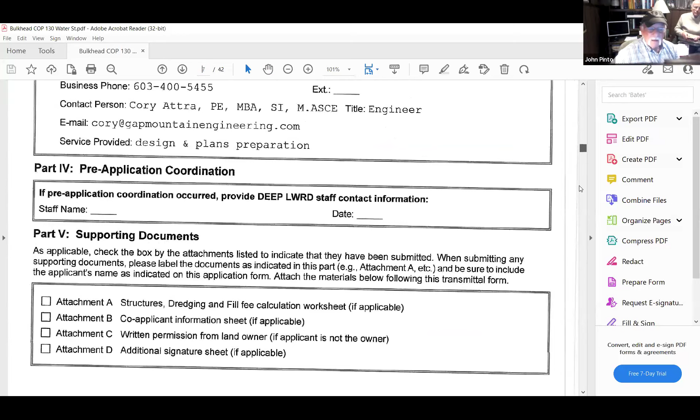Well, we could start with the first one. We're looking at the pictures. That just shows location, site location. Bring this way down here, way at the bottom, just keep scrolling down. Okay, there you go.

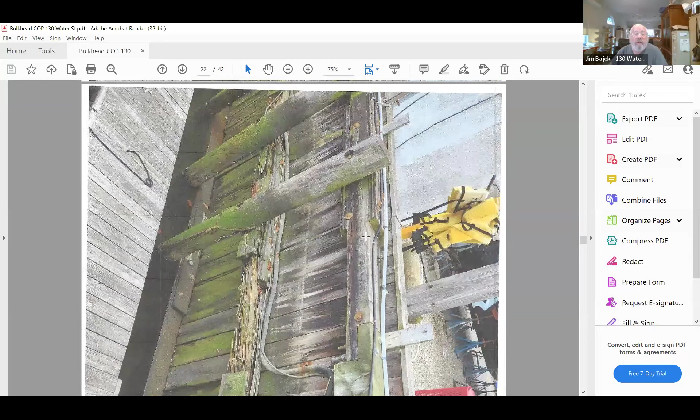There's photographs of the site. By the way, the wall is starting to fail. I don't know if anybody's been down there lately, but Gary Wetmore from GNC Marine did some patching up recently just to stop whatever was actually in the action of starting to fail in one section. So he put some new boards in that area, just so we can buy some time.

Amelia, can you highlight, with your marker since you have control, the area that Mr. Bajek is referring to -- the wall? Right along here? Yeah, right, exactly, and that includes the travel lift pit. So the new wall will be physically connected to the existing walls on both adjoining properties.

Why don't we shift to another plan? Yeah, you see, I couldn't flip these files, Jim. Yeah, neither can I, unfortunately. I wish I could show you my plan, but when you submit these JPEG files, Jim, I've always had a little bit of a problem manipulating those files.

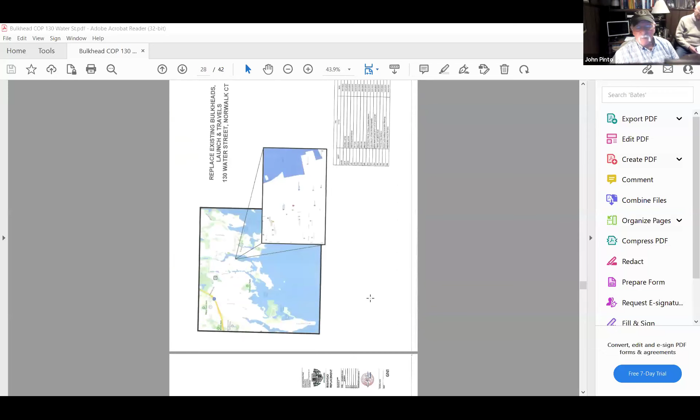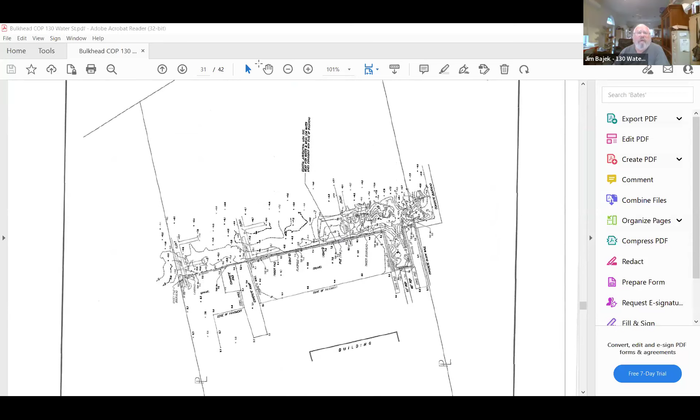Do you Xerox copy them first, or send them as a direct JPEG file? I put them in my scanner, and they get scanned that way. Okay, all right. But I've got the electronic files -- there we are. I should have sent the electronic file to you, John. That would be a lot easier, Jim, because I could then manipulate them and turn them to the proper orientation. Next time I will definitely do that. Okay, that's helpful, thank you.

Okay, well, that's just an overhead view. If you could scan down, just keep going. That just shows sections.

Okay, that's from the topo from the survey that was done. We show elevations on that, and we also show on that plan the new wall that will be within 18 inches of the old wall. So scan down a little bit more.

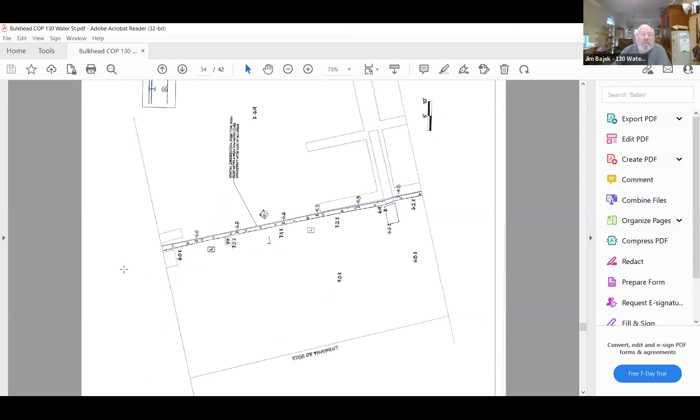That's kind of the same with the other one, just a continuation -- that's the travel lift pit. Let's scan down some more. Okay, right there -- that is pretty much the meat of what we're doing.

We're going to be excavating along that line that starts near the bottom of the wall there and feeds back towards the land. So you're talking about the shaded area, Jim, right? Yeah, I'm trying to. Right, okay, I got it.

We'll be removing that material and temporarily stockpiling it. We're also going to be testing it as we're removing the material to make sure we're not dealing with contaminated sediments, and we're going to be retaining what's clean and what might be suitable for reuse back into that location.

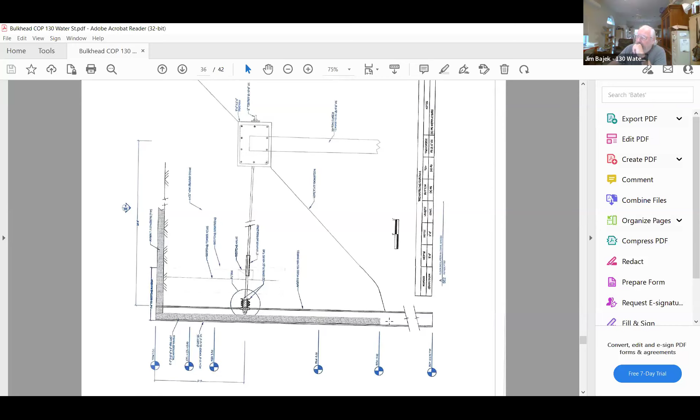Once we do, we're going to excavate in sections. We're not going to excavate behind the entire wall at once, so we'll be working with sections so we can deal with the material better. Then before we actually do the excavation, we're going to install the sheet piles in front of the old wall, so we'll have a strong barrier that we would excavate behind.

It's going to be steel plate, right? Yeah, yes, regular, kind of the tongue and groove steel sheet piling. Right, and are you replacing a timber bulkhead there that I saw in the photographs?

Is that right? Yeah, right now it's a timber bulkhead. The new one's going to be all steel, but the timber one will remain behind the new one. We're not going to remove it, we're just going to install the new wall in front of the old wall, and then we'll excavate behind the old wall. We will probably end up removing some of the old wall because it's probably going to start crumbling. Any good sections we might just leave in place.

But once we excavate enough for driving in piles for the deadmen, that will be done. The deadmen will consist of timber piles driven down into the earth, and then a concrete encasement will be installed on top of each pile, which will be the deadmen. Then a 2-inch steel rod will be connected from that deadman to the new steel sheet pile bulkhead.

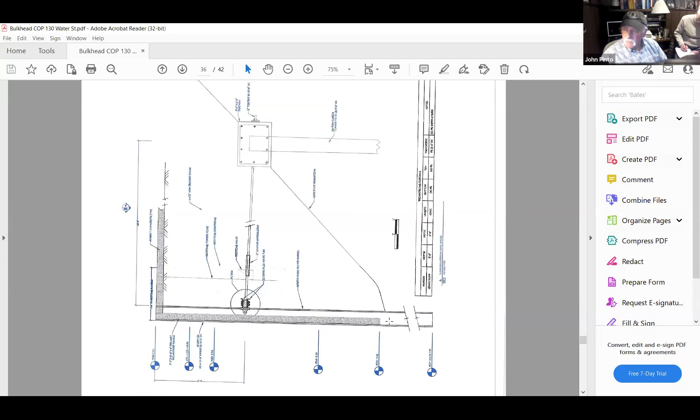That was a concern. Okay, so, sorry, one more clarification. You said it was going to be a corrugated steel sheet piling for the final wall, but the drawings show 5x5 precast reinforced panels. So it looks like it's reinforced concrete as the final bulkhead.

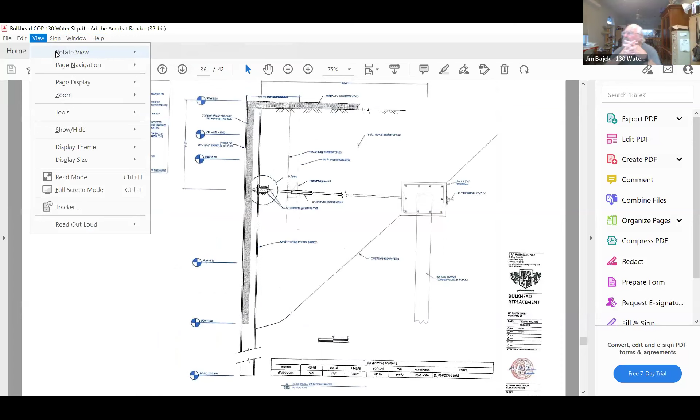On this, you can turn the drawing if you hit view, rotate right, you just lose the other ones. That's what I got up on my screen. Yeah, I see exactly what you mean. Yeah, you did it one too many.

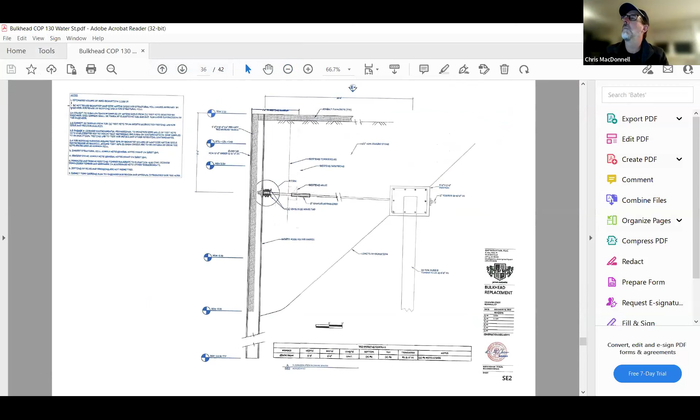My last conversation with Gary Wetmore, he was planning on doing sheet metal, but I understand what you're saying here. Yeah, it's the first note down along the vertical wall there, that it's precast reinforced panels. That's concrete, which is fine. It's a different construction.

You'd need... It's funny, that was actually my question as well, Chris, because those 2-inch couplings that are basically the reinforcement to keep that tension, I thought I saw somewhere there was 10 feet on center for those. Is that the frequency? For the piles, for the dead men? No, for the reinforcements, those are basically the tie rods that are coming back to keep the pressure in.

Let's see, and that would be consistent with a precast panel. It's funny because I didn't think... but they would be on 5-foot centers.

But yeah, I was looking to see, as Chris is mentioning, where the depiction of the tongue and groove style exterior metal facade was. It didn't seem like it appeared on the drawings. You are correct on that. I'm not sure, I'll have to get clarification on that. Well, these are signed and sealed, so they're what the engineer wants. I'll get it from the engineer and from who's going to be doing the work.

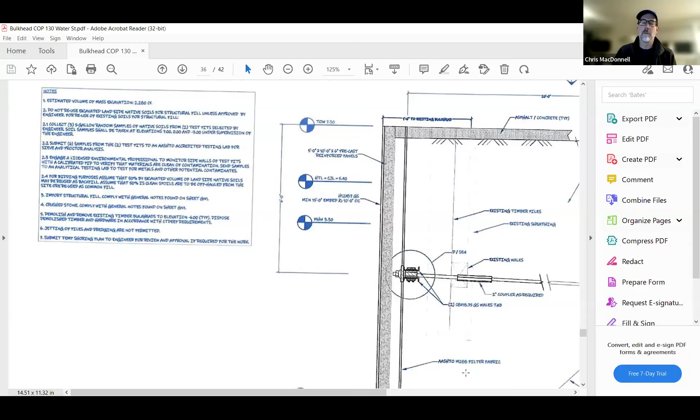So is this going to be dewatered in order to construct the dead men? No, it's below, it's in the tidal zone. I mean, it's below mean high water. Well, Jim, I guess it depends how watertight the new wall is before the excavation starts.

Well, Jim, as far as the commissioner is concerned, you certainly get to poll your response to that. But I think we don't have the actual diagram, the drawings that you propose, and we would like to have what the new proposal would be before we can pass on this. I was wondering if we should table this until next month. I think that would be a good idea, and I think I'd like to have the engineer that designed it present as well.

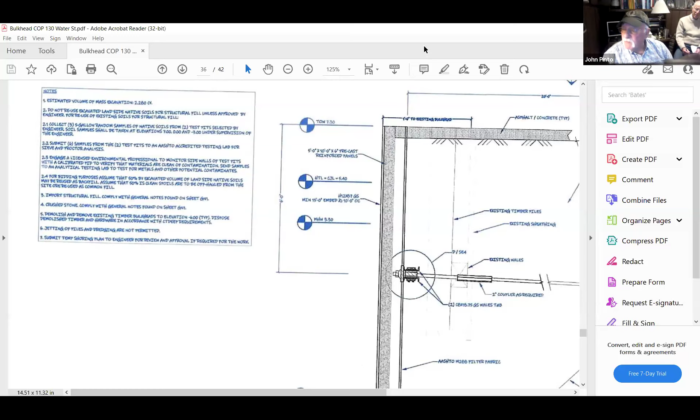Well, all right, so why don't we table this till next month? When you have all the plans together and all the I's dotted and the T's crossed, we'll look at the diagram as reviewed in the presence of your engineer. That's fine, I have no problem with it. Okay, all right, so we'll put this on abeyance until next month.

I'm not the engineer, so it's hard for me to answer some of these technical questions. That's all right, I'm glad we do have some engineers, especially Chris, and certainly Mr. Kibbe is well aware of reading diagrams. Thank you very much for that, guys. And we'll hold this in abeyance, Jim.

All right, so when you get your plans together again, resubmit them. If you can submit them again in that PDF format, we'll... Yes, we can certainly do that. That'd be no problem. Yeah, identify where the stockpile area is on the new plans too. Well, that would be helpful, because before we make any recommendation, we would like to have everything intact in one place. Sure, yep, thank you. All right, Jim, thank you very much.

All right, the next application is at 10 Nearwater Road. It's a COP application, a modification to an existing residential dock. The agent is Tim... oh boy, Barton...

I can't say it, Alan was having problems, so am I. I got to get my lips recapped as well, Alan.

Di Bartolomeo, anyway, from Sound Engineering Associates. It's an application from Andrew Ryan, who proposes to construct a fixed timber pier measuring 4 feet by 70 feet, of which 10.5 feet will be waterward of the coastal jurisdictional line, plus a 2.5 foot by 24 foot aluminum gangway leading to an 8-foot by 12.5-foot floating dock. The work includes removal of 10 timber piles and installation of 6 new timber piles.

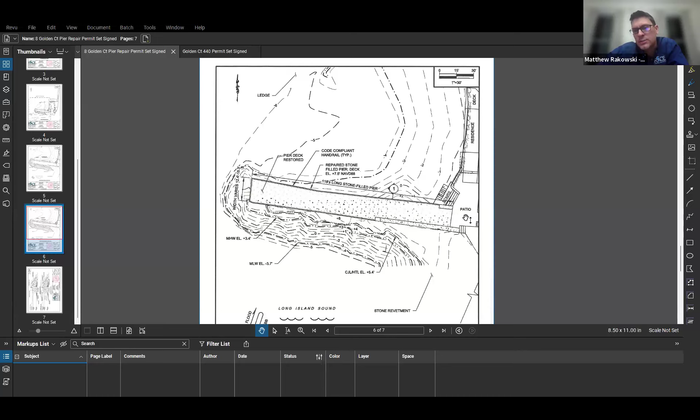Everyone got my screen? Yes. So applicant is seeking to just restore this stone-filled pier structure. It's a whole old historic permitted stone-filled pier. The face of the pier, which is on this north side, stones have been slowly shifting and moving. So what we're seeking to do is peel back the current walkway on the top surface, pull back the stones, reset the face stones, grout the inner core, then pour a new structural slab over the top, tying into this patio. So raising it, there's a couple steps that go down to this now, just to make a seamless integration with the upland area. We're seeking to get rid of those couple steps so you can walk straight out onto the pier. The proposed work is all within the existing footprint, we're not extending any further waterward.

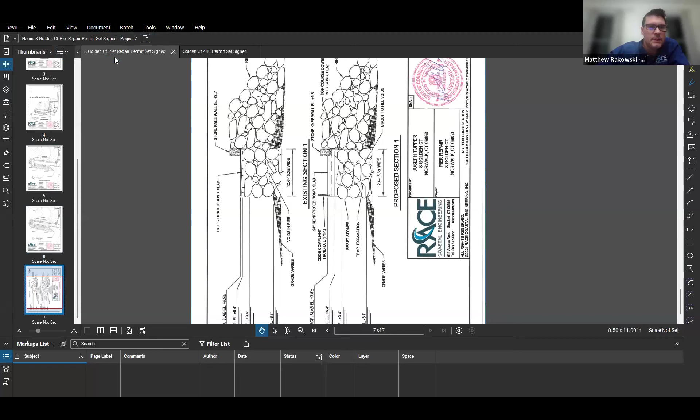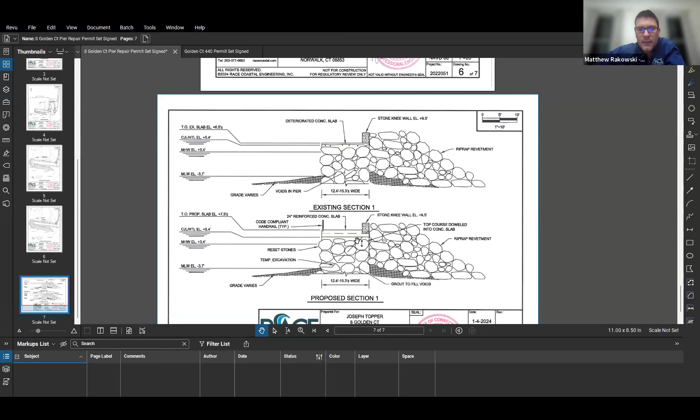Do have a section here, which I can rotate. So the existing stone-filled pier on the south side, it's backed with an authorized stone riprap. So basically pulling back this slab, resetting stones on this face that have shifted and moved, grouting the center core, and then pouring this new structural slab on top. Work will be confined with the turbidity curtain, anticipate that it's all done by land with a mini excavator, crawling out, demoing the slab, and working their way from the waterward end back onto land as they're pulling things apart, resetting stones. They're slowly working their way out of the site with the final installation of the structural slab.

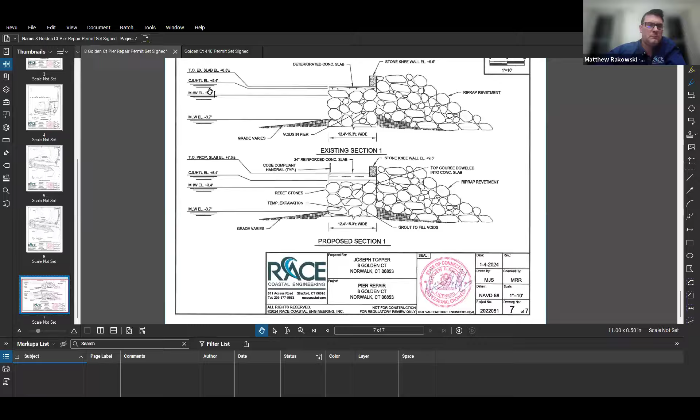Does any of the commissioners have any additional comments? Matt, Chris? Yeah, a couple questions. I guess if you wanted to show, we got to see some of this earlier, but if you wanted to show some of the photos just to give people a better idea of the existing condition versus the new. Yeah, those are very helpful, and that'll also help people understand the tie-in between the secondary application that we're going to talk about next. Right, it's going to be in the exact same footprint, so there's no change in the footprint of the replacement of the wall and the structure. Correct, yeah.

Or there we go. Right. Yeah, they are. Yeah, so perfect.

So the structural slab is cracked, deteriorated. So he's seeking to restore that. Again, since he's restoring that, he wants to repair it.

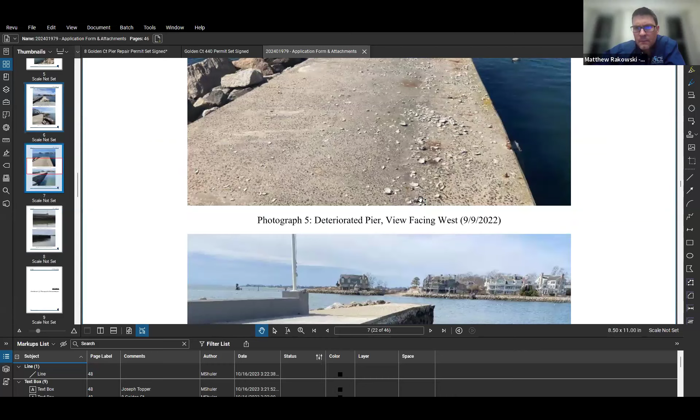And again, you see those two, it's like one full step and then a half step. So again, trying to just raise it so that it's a smooth transition between the patio area and upland area to this here. So Matt, we have a question about whether it's consistent, but like it's an improvement of the existing structure and certainly...

Matt, is it fair to say that the other side of this is deteriorating? And if it's not repaired as you're proposing, then there would be a deterioration of material into the harbor? Correct, we would envision that the stone shifting would get worse, sections of that interior wall would start to fail inwards, likely leading to the loss of these slabs into the water.

And I think with that understanding... and it's within the same footprint, then a finding of consistency with the plan would be appropriate here, because you're repairing a structure that otherwise could result in an adverse impact on the harbor. But with the understanding that it's within the existing footprint and that you have proper measures, best management practices during construction to protect the harbor, then my suggestion would be this could be consistent.

Consistent with the plan. Yeah, because if it was just in the same footprint and wasn't improving the situation in the harbor, then we'd have no problem with the project moving forward. But now here, since it's going to be an improvement of this existing structure and protecting the harbor from further debris going into it, then we would find it certainly consistent with the harbor management plan.

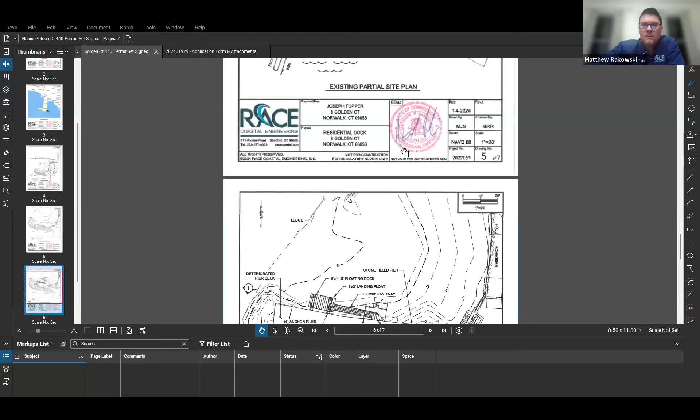Okay, yeah, so this project's a residential floating dock. This is 8 Golden Court, same property we were just talking about with the stone-filled pier in the last application. On this one, he's seeking to add just a little access platform to get to the gangway down to a floating dock. Due to the grades and how shallow it is, to keep the float 18 inches off the substrate, we ended up having to install a four pile system so that we could put a frame underneath so that the floating dock during low water would sit on the frame, so that it doesn't impact the substrate. The system was pulled as close to the pier structure as possible, minimizing encroachment out into the water, due to the fact that there was really no additional water depth that could be gained from coming out perpendicular to the system. So keeping it condensed as close to the existing pier structure, we thought would be the best beneficial use for the applicant.

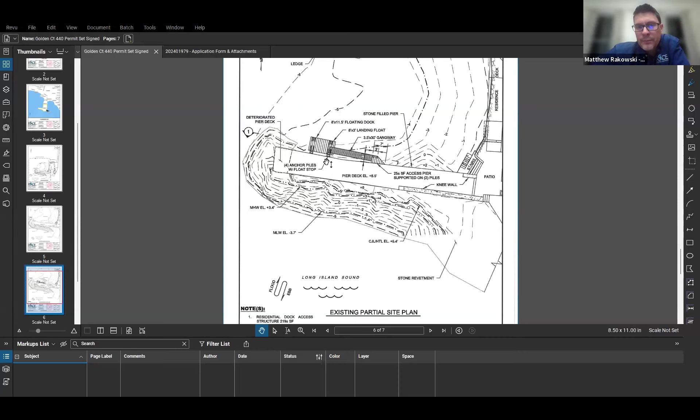The piles would be anticipated to be impact driven by a barge and land barge based crane, followed by laborers and land-based equipment for framing out the upper landing as well as the framing for the floating dock. Once the framing and the pier are set and installed, the floating dock would be floated over and set, and then the gangway would be set on top, again via the land-based barge-based crane.

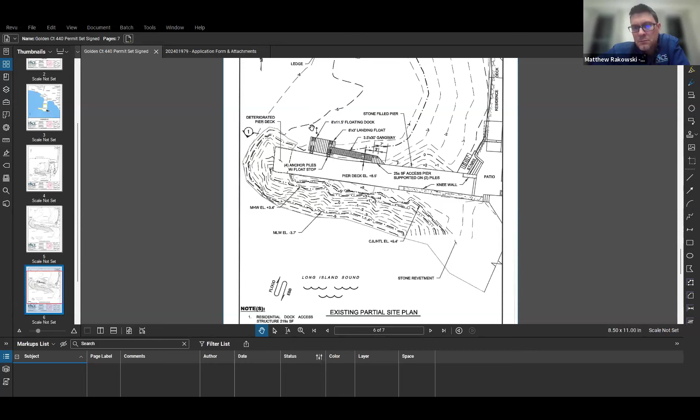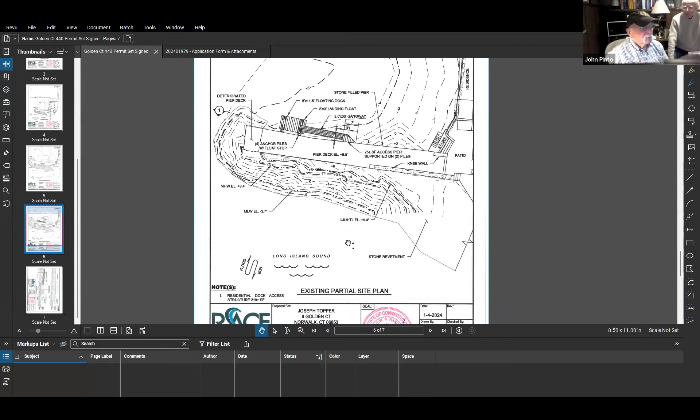Matt, oh yeah, okay, all right, Jeff, you have it. Yeah, so this is a 440 dock, so you're not applying for a certificate or a permit application. It's in effect approved as of right, unless there's some issues raised with respect to navigation or the environment, but this is a registration, not an application. Correct, this is not a COP, it's under a general permit application. Oh, okay, all right.

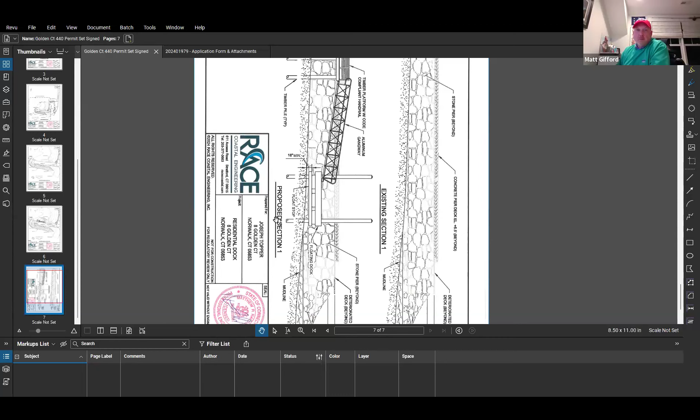Okay, that's been changed. Is there enough water here so that a vessel attached to it would not rest on the bottom, or how? It's about a foot of water depth during low water on the face of that dock, so that's why the floating dock system is up on a frame. So yeah, long-term berthing, etc., wouldn't be viable through all tide cycles here. Well, that would be certainly our concern, and certainly a concern of the Shellfish Commission. Yep, that any appreciable length of time at that dock would not require being at low tide, right.

Does anybody, Chris, Matt, have any comments, concerns? No, between the original and this is pretty clean, and all the information was there. So I think, Matthew, thank you for the complete nature of this.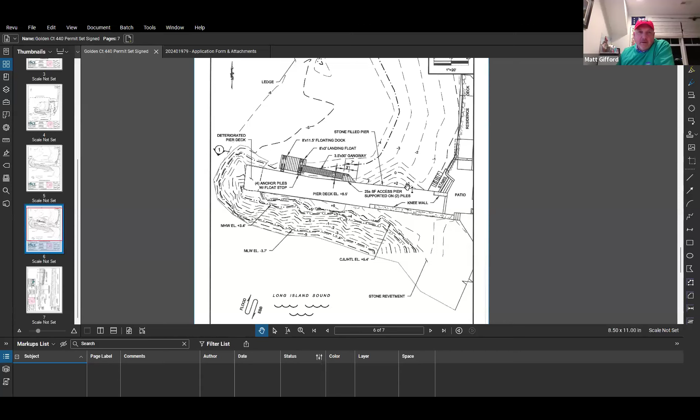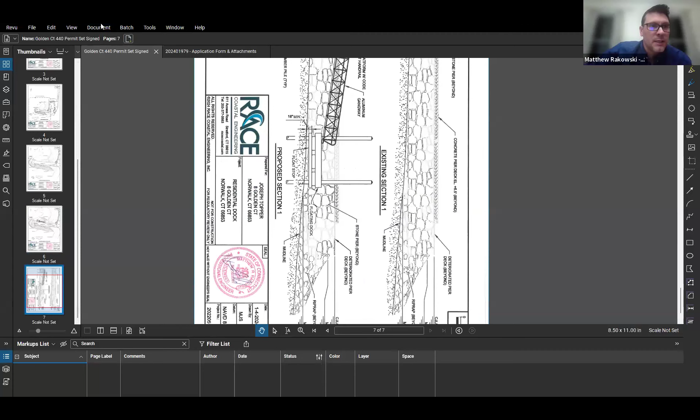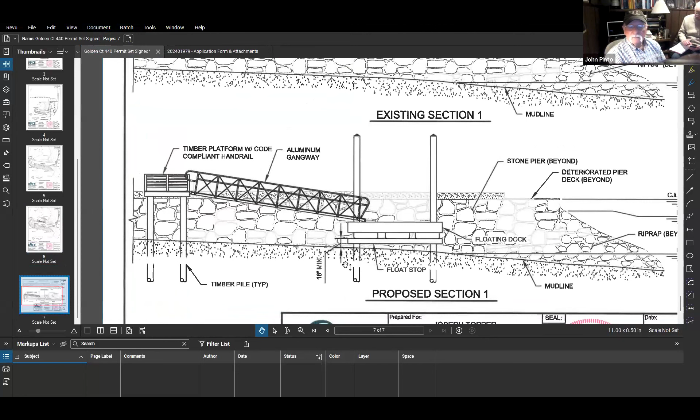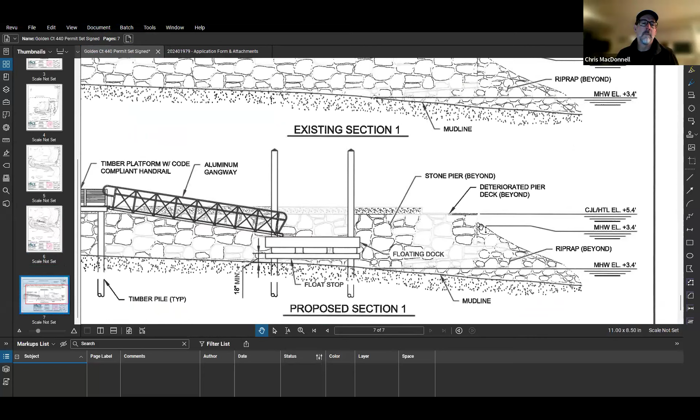Thank you. Is there a section of the floating thing you could put up again? Yeah, hold on, let me rotate that for you. It's upside down. Here we are. Okay. Thank you. Oh yeah, so the access platform is the same elevation as the stone-filled pier, so a smooth transition from the upland area onto this pier, and then walking down onto the floating dock, with the timber float stops underneath to support the frame during periods of low water.

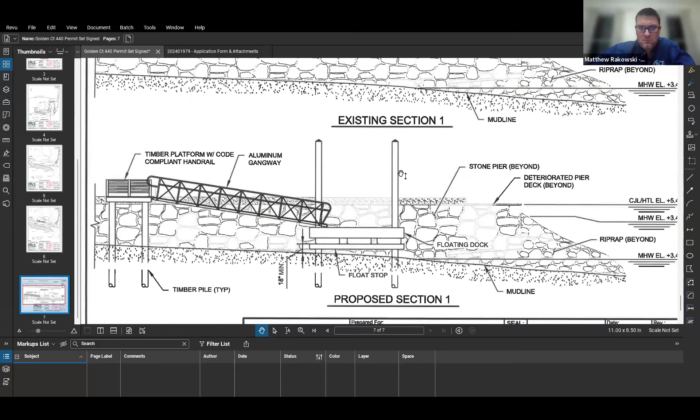Is there anything else? Anyone like to second that proposal? I'll second. All those in favor?

Aye, aye, aye. Doing a good job here, guys.

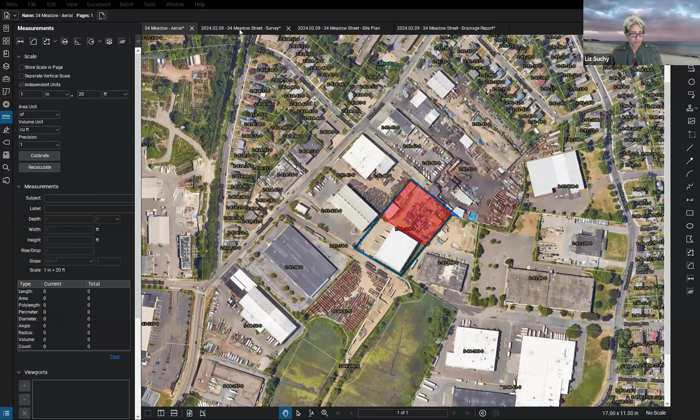Just a little zoomed in section of this piece of property. As Liz mentioned, there are 2 existing structures to the north, another masonry building to the south, with all the car storage sitting central on this piece of property.

Again, this is the existing rock crushing facility here to the west. The entire property is within the AE 11 flood zone, and there is currently no drainage on the property. The water basically sheet flows off property to adjacent properties to the east.

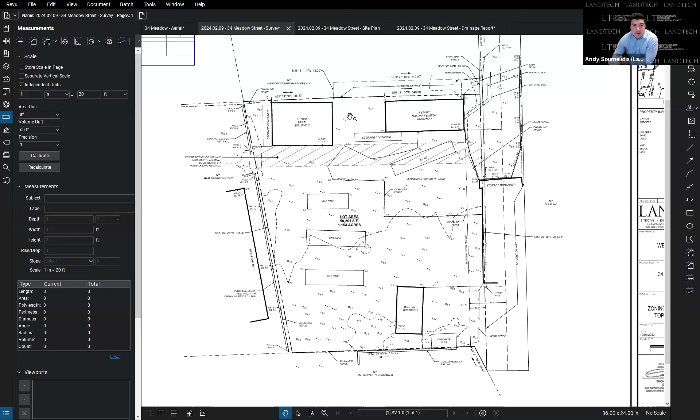Under proposed conditions, we're looking to add a 20,000 square foot structure, which would house another rock crushing facility indoors. To the west and south are the storage bins, again mafia blocks holding up and containing that material.

The property to the west here was raised above the base flood elevation about 7 years ago when we did this project. So the idea here is to continue those retaining walls around the perimeter of this project and get the structure above the base flood elevation of 11. The finished floor of that new structure will be elevation 12, 1 foot above the base flood elevation.

You can see here a fairly large drainage system sits central with some new catch basins that connect into it, and another smaller drainage system. These are underground detention Cultec wrapped in crushed stone and filter fabric, with a catch basin here at the entrance. So basically all the runoff here and all the roof drains also connect into this larger one.

So all new impervious surfaces will be captured and piped underground to these detention and filtration systems. We're reducing the storm event up to the 100-year storm, as well as providing more than double the water quality volume that's required on this site. That's really driven by needing to reduce the 100-year storm, so there's ample capacity within our new drainage system here to really reduce flows.

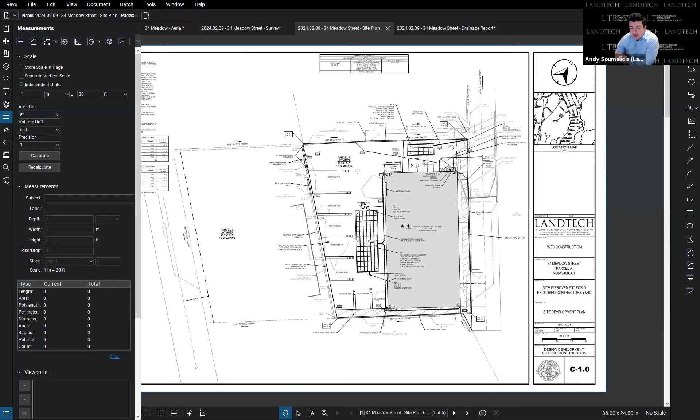And I'm sure we would have heard from neighbors if there was concern with what's going on next door. So yes, we are putting in measures to attenuate the sound.

With that understanding that the improvements in stormwater and dealing with flood hazard, a reasonable finding would be consistent with the harbor management plan. To the best of my knowledge, there haven't been any noise complaints registered or issues related to the existing operation in the adjoining building. This structure is tucked behind other buildings, and that in and of itself acts as attenuation of noise, so we can move forward with a proposal that the application is consistent with the harbor management plan because of the improvement of existing conditions of water effluent flow, runoff, et cetera, and noise abatement.

Has there been any testing of the soil, especially in the areas you're going to be removing? You're going to have to remove a fair amount of soil to put in the Cultec system. So we're going to be building above the existing conditions because we are filling. The current grade around the site is elevation 10 down to elevation 8, so we're not taking out material. We're going to keep all the material on site, and we're basically capping it with asphalt in our building. So we're not going to be hauling any material.

Including where you're going to install the Cultec system? Correct, because there's a considerable amount of fill. We don't anticipate any material coming off site. Right, all right, thank you.

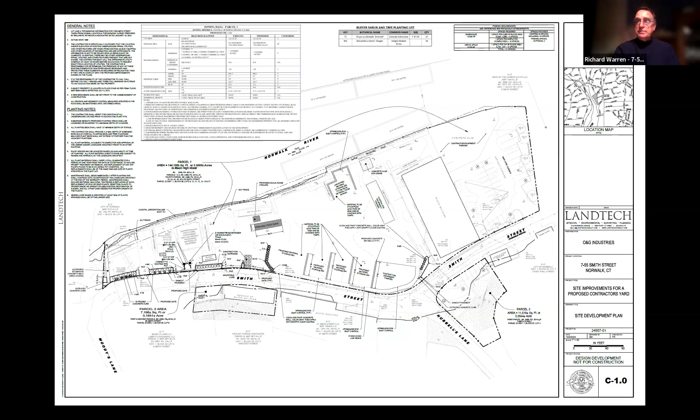Does anyone else have any comment? They're restoring waterborne transport.

That was something that one of the many reports commissioned by the city to evaluate various places in the city suggested be reviewed—that waterborne transit is important. It gets trucks off the turnpike. It's something we should be taking advantage of in an ecologically friendly and appropriate way. Use of the harbor and the Norwalk River with this type of use is beneficial and consistent with the Coastal Area Management Act, since it's waterborne transit.

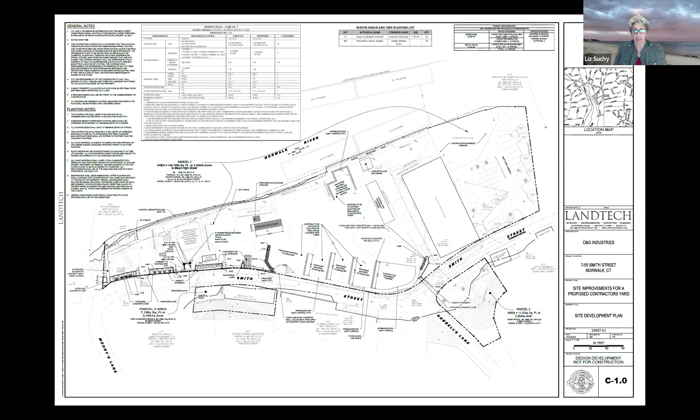From a personal standpoint, as an individual, I certainly recommend and go along with using the water as a source of transport rather than keeping X number of trucks on the road. We try to do that with regard to the neighbor across the street, Divine Brothers, and the oil trucks coming in at one time, or barges—sand barges and such—that eliminate the amount of truck traffic on the road.

It seems appropriate now that we're hopefully going to be confronted with a working railroad bridge in the near future, a reliably opening bridge. So this makes some sense.

So certainly willing to restore the use of that upper harbor with regard to traffic going underneath that bridge, bringing a bit more life up to that area rather than just people walking along the waterfront.

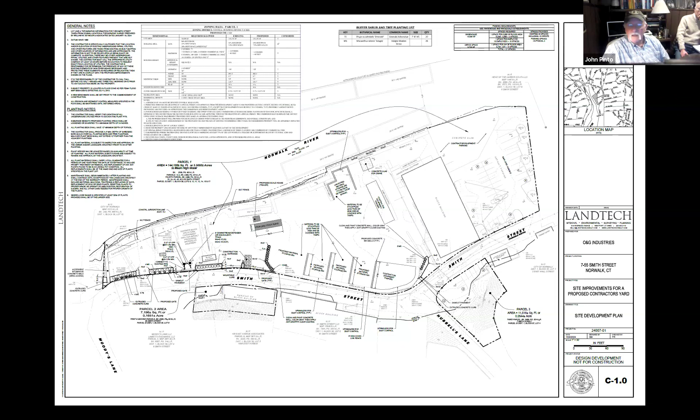This I would find, from my standpoint anyway, we'd like to make a recommendation that the application is consistent based on the improvements with regard to the conditions of water effluent in the harbor with the harbor management plan. And so I wanted to ask about the navigation channel in relation to where you'd like to station barges.

Are the barges intruding on the navigation channel? Because with the other set of barges across the river—Divine hasn't really tucked that barge up very close there. If you have another barge on the other side, you're pretty much blocking access to the marina at the head of navigation.

If I may respond to that—Richard Warren with O&G Industries. At the time the federal channel was last dredged, DEP and the Army Corps recognized that, and there was a revision to the channel line that works around the barges snugged up against our berth. We've drawn those on our plan to accommodate being outside of the channel line.

It will be close if there are barges on both sides. Historically, we've always negotiated with Divine, and because we use similar tug companies, we operate and address it, obviously not bunching up the end of the harbor, but there is still navigable water between us to get to the marina, even if both sides are active.

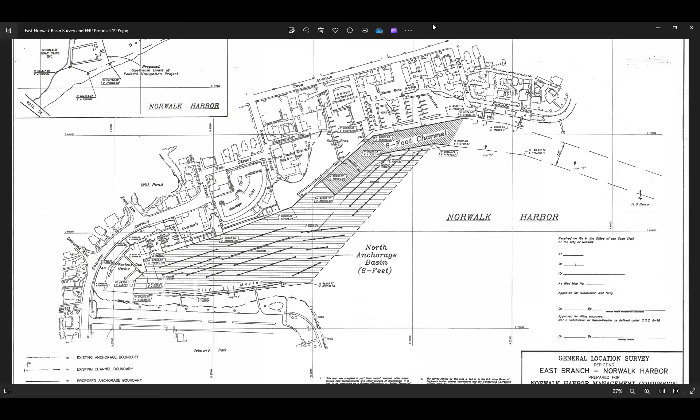So the concern, if you let me see if I can increase this here. All right, this concern now, back in the early 90s, the Harbor Commission, based on the Army Corps of Engineers noting that there were several encroachments in the East Basin, had certainly by an act of Congress and certainly working with the Army Corps to change the boundary lines of the navigation channel, and we're also at the set point at the end of where the navigation channel is. So we truncated that to fit the needs of many of the people that were encroaching in the harbor.

I'm sorry, what is before us now? Well, there's nothing before us now, but I think there's going to be some further interest in putting boats along this dock here, this line here. Now, if you notice, here's the Federal Navigation Channel, and what I guess several people at Vantage Point want to do is to keep their boats moored at the end of this dock here.

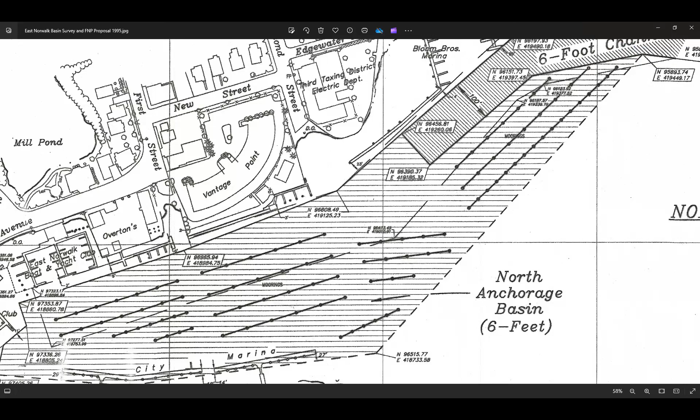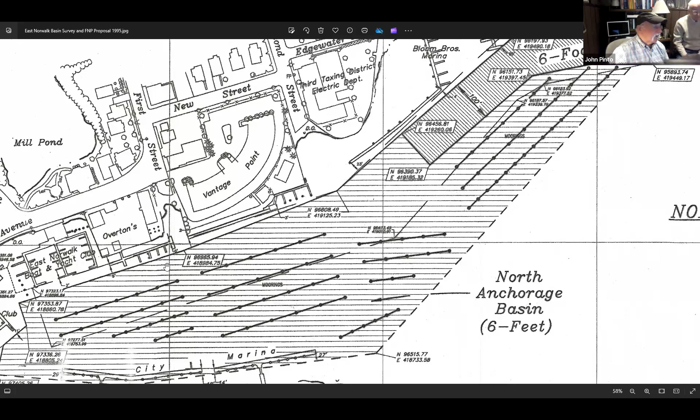That's right. And of course, the other issue at the end of First Street is they've got that finger sticking really in the right of way of First Street. They've encroached by 12 or so. And if we're talking about street ends and kinds of development and waterfront access for the residents of Norwalk, what better spot than to have a little access point there, where somebody's put up a corrugated metal fence so you can't get in there.

Well, again, Alan, that's not up for grabs, but that's up for a future permit that Overton is going to put in, and they still retain this little section right here, which is encroaching on the city's right of way in this area. Right, and that should be opposed as well, as far as I'm concerned. I guess, exactly, that's my opinion.

So these are some of the things that we're going to be faced with, and things that we're going to have to contend with as a commission. And what I'm really concerned about is, again, we certainly have the right to review that application, but they're going to start challenging the Harbor Commission's right to review the application based on that court decision.

That's happened in several other towns around the state already, so I'm concerned about that. These applications are forthcoming, and I'm sure they're going to challenge the Vantage Point dock signage. Maybe a letter should come from the DEP as well, Alan. Rather than asking the DEP to enforce this, I think we ought to try to enforce that restriction ourselves and copy it to DEP, telling the person their signs are missing. Also keep in mind the next application forthcoming from Overton still contains that little finger pier. Chris should pay attention to that as well, regarding the street end usage in this area.

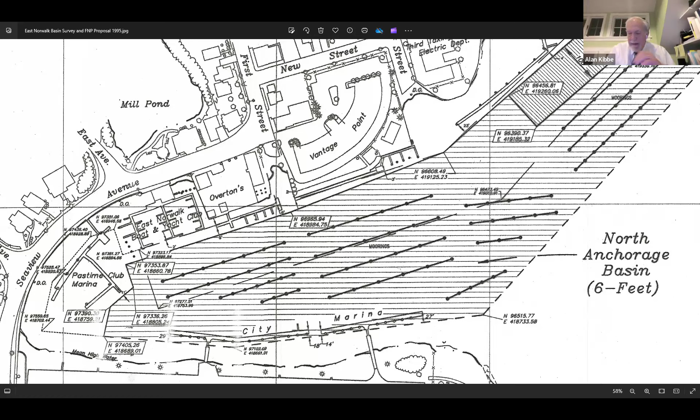Is there any correspondence, Amelia? I don't have any. I do not have any correspondence either. Well, then we can move right along into the election of officers.

At our last meeting, we accepted the recommendation of the nominating committee for the three officers we elect: the commission chair, the vice chair, and the secretary. The recommendation was for myself to continue as chair, Jeff Mangles as vice chair, and Lori as secretary. The question now is, are there any nominations from the floor at this point?

The way we've run this in the past is that the nominating chair announces the positions and names and asks from the floor three times whether there's any additional nomination. So again, we have as chair Mr. Alan Kibbe, as vice chair Mr. Jeff Mangles, and as recording secretary Ms. Lori Jones. Do I hear any nominations from the floor? Again, chair Mr. Kibbe, vice chair Mr. Mangles, and recording secretary Ms. Jones. Any nominations from the floor?